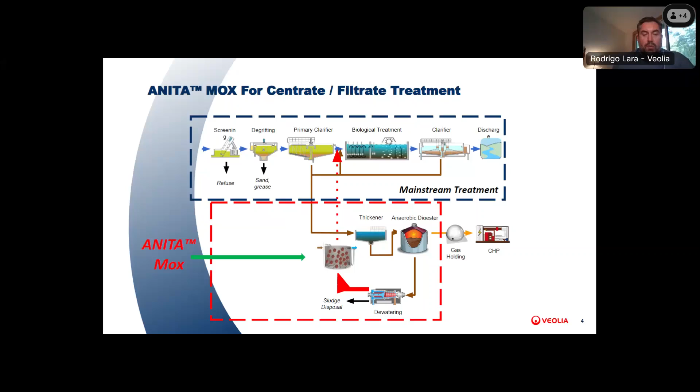Our second mode, IFAS, has the benefit of having both suspended growth and biofilm due to the use of return activated sludge by use with a clarifier. The IFAS option would be mainly for THP or food waste co-digestion systems.

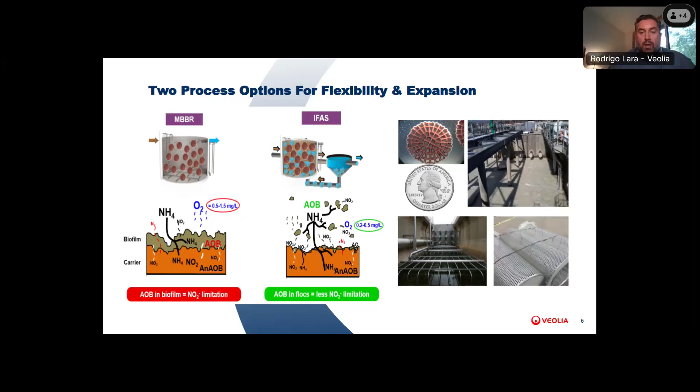The anammox media and in-basin equipment, as shown in the right slides or photos, is equipment Veolia has been using for decades in the mainstream process for traditional MBBR or IFAS processes. We've now incorporated that same media and internal tank equipment to now treat anammox bacteria. The equipment that we've used for mainstream MBBR or IFAS has been in operation around the world for over 20 years and has been highly successful. So we have taken a proven technology and incorporated it into a new process opportunity.

Biofilm technology is proven to be simple, stable, and robust. Some of the benefits that you would expect to see and will be covered by Phil and Dustin are its operator-friendly technology, resilient, it works with flexible dewatering schedules, minimal operation and maintenance requirements. Biofilm technology significantly lowers risk of anammox washout. It's very tolerant to high TSS, polymer, DO, pH, etc. It also has greater protection from shocks and toxicity.

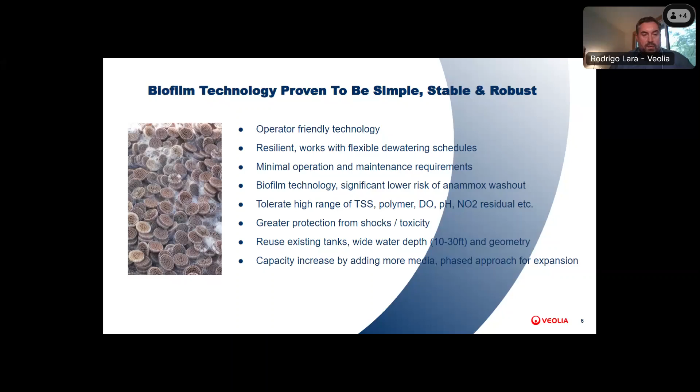As mentioned before, it is able to reuse existing tanks with a wide water depth and geometry configuration capacity. And it also has capacity increased by adding more media over time as the plant requires more process treatment. Rounding out the anammox overview, our existing plants are all operating as designed and are fully open to visitors. We have also had a number of facilities recently add in more media fill for increased performance.

ANITA Mox has been pre-selected on a number of upcoming projects, so please keep a lookout for announcements on Veolia's social media. We are continuing to pilot ANITA Mox across the U.S. and have recently added in more pilot units, so we are able to continue to offer piloting at facilities around the U.S. simultaneously. And with that, I'll turn it over to Phil Heck with Central Valley.

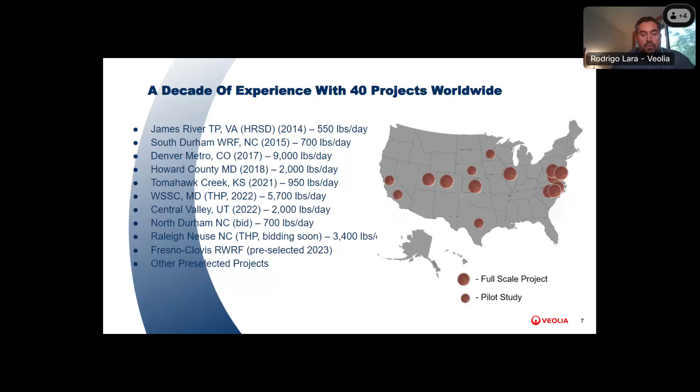Well, thank you all for joining this webcast. I'd like to talk a little bit about Central Valley Water Reclamation Facility and our experience with anammox. First, just to orient everyone, Central Valley is a regional wastewater treatment facility, and we're located at this gold star just south of Salt Lake City, Utah, and we serve the central part of the Salt Lake Valley. On the east side is the Wasatch Mountains. That's where the ski areas are that most people are familiar with.

And then the west side of the valley is the Oquirrh Mountains. So a fairly large area, about 615,000 people. And we're currently undergoing some plant upgrades and expansion that'll take our capacity to 84 MGD. Okay, next slide.

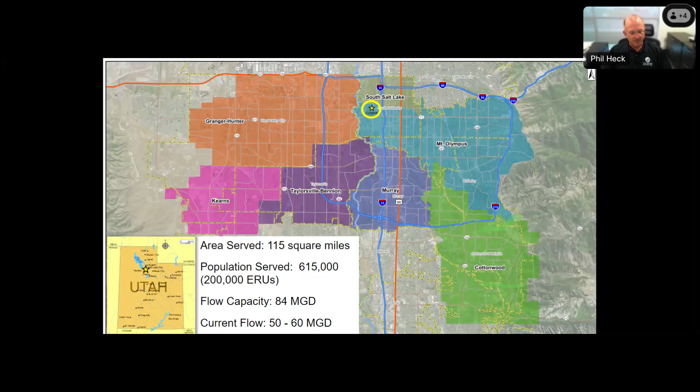Back about 10 years ago, the state of Utah Water Quality Board implemented a new rule that was called the Technically Based Phosphorus Effluent Limits Rule. That required all treatment plants in Utah to reduce their phosphorus in the effluent to less than 1 milligram per liter. We were a trickling filter solids contact plant at that point. We currently operate under that mode, and we could not remove phosphorus or nitrogen.

So we immediately started investigations on how we were going to meet this new rule. We hired an engineering firm, started a process selection process, and once we figured out what we were going to do, we did pilot testing back in 16 and 17. When we confirmed our designs and selection would work, we started design. And then in 2020, we actually started construction of our main biological nutrient removal process. And this is a process that will remove both phosphorus and total nitrogen.

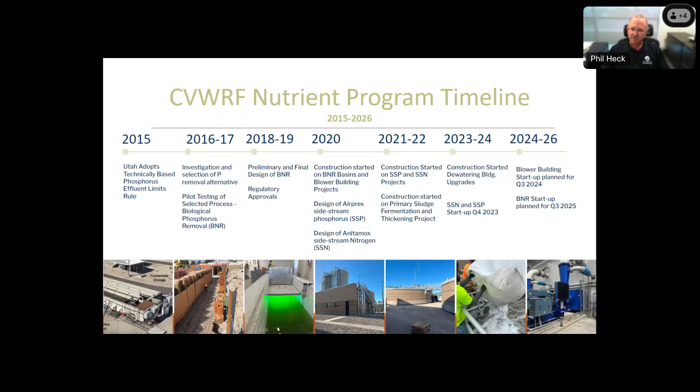As part of this selection process, we investigated side stream processes for both phosphorus and nitrogen removal from our belt press filtrate. We started the design of these two systems in 2020, and just last year in 2023, we finished construction of both the side stream nitrogen and the side stream phosphorus processes and put those into operation. We are still working on construction of our main biological nutrient process, and that will go into service next year. Next slide, please.

So an overview of our plant layout. We have sort of in the middle there, BNR anaerobic basins, and then BNR anoxic and aeration basins. Those are new processes. We have a BNR blower building, and that's all part of our mainstream biological treatment process. And we have a side stream phosphorus removal process that precipitates struvite from our digested biosolids. We have a primary sludge fermentation and thickening process to generate VFAs for our anaerobic basins and for denitrification.

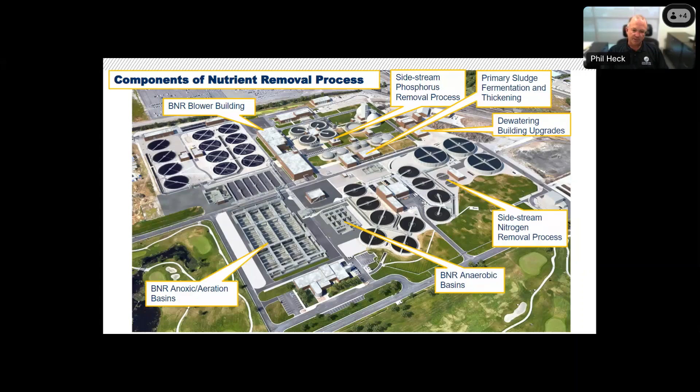We have a dewatering building. We currently have belt presses, but we're also adding some centrifuges in an ongoing process right now. And then finally, we have our side stream nitrogen removal process. And this is treating the effluent from our dewatering process and the filtrate before we return that flow back into the primary effluent. Next slide, please.

So on a process flow diagram, the upper area is all the facilities related to our new biological nutrient removal process on the mainstream and some solids. And then the two boxes down below are our side stream phosphorus. We've selected AirPrex, and then our side stream nitrogen, and that's the ANITA Mox process that we'll get into.

I'd also like to just note over on the left side, we are adding a facility that we will be starting construction in the next couple of years for high strength liquid waste. That's food waste from some industrial sources. And so we will be bringing that in and co-digesting it. And this is going to greatly increase our nitrogen load in the future. Okay, next slide, please.

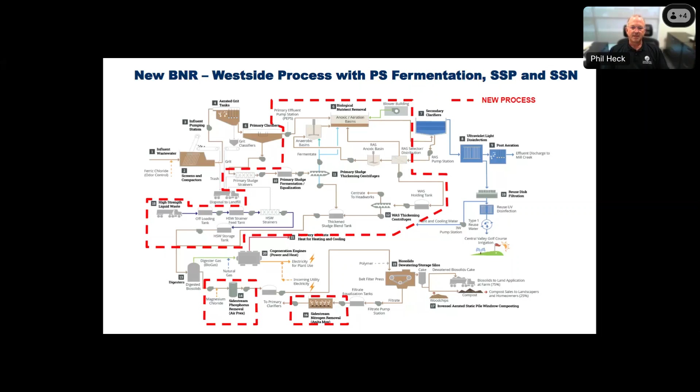So in a typical BNR process, I guess the question is, why consider the side stream nitrogen removal? Well, if you look at the lower part of the diagram, the filtrate returning back to the plant contains a fairly high level of TKN, mainly in the form of ammonia. And this typically is about 15 to 20% of the total nitrogen load on the influent. And so this ammonia that's being returned must then be nitrified and denitrified to successfully operate a BNR system.

And this consumes a lot of oxygen and carbon. And so we considered this in the design of our system, and I'll take you through some of the considerations and how it affected our main BNR process. Next slide, please.

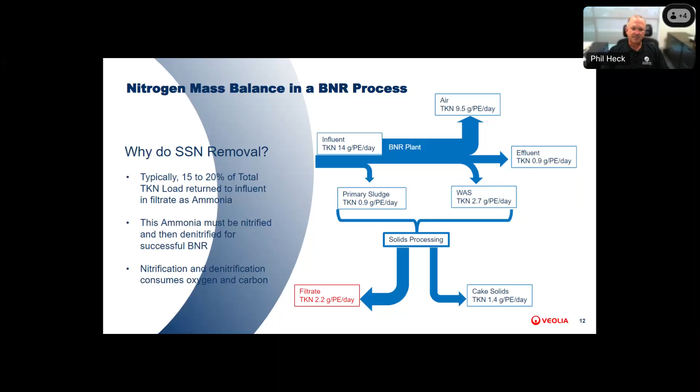So this table, I'm showing some of our modeling parameters when we were designing the overall biological treatment process here, incorporating side stream nitrogen and side stream phosphorus. So the baseline BNR column, this is the column of our design without side stream treatment processes. And then the next column over, BNR with side stream treatment. This incorporates both nitrogen and phosphorus removal. And so as you can see, there's a lot of benefits to the side stream processes.

We were able to reduce our basin volume of our aeration basins and anoxic tanks by about 16%, or 4 million gallons. Our fermentate needed for phosphorus removal and denitrification decreased by about 66%. Internal mixed liquor pumping decreased by about 54%. Our aeration demand is decreased by about 30%. WAS production about 24%, and our total power required by about 28% by incorporating both of these types of side stream processes. I'd say a lot of the benefit here is with the nitrogen removal process, especially with power and fermentate.

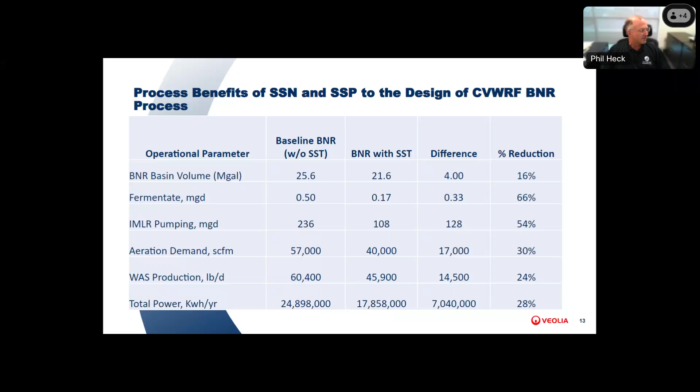We also looked at the financial benefits of both side stream nitrogen and phosphorus removal to the BNR process. And this is the main benefits for side stream nitrogen removal. So our WAS production and then the treatment and disposal of that WAS, the cost savings was about $850,000 per year, incorporating side stream nitrogen. Then on our aeration and pumping power, that's about $630,000 per year. So substantial operational cost difference.

On capital cost, there's not a lot of difference between BNR without side stream nitrogen and BNR with it. There's a small savings of about $4.7 million. But overall, if you look at a net present value over 25 years, doing the side stream nitrogen made sense. And the net PV is about $24 million. So that's a substantial savings to us. Next slide, please.

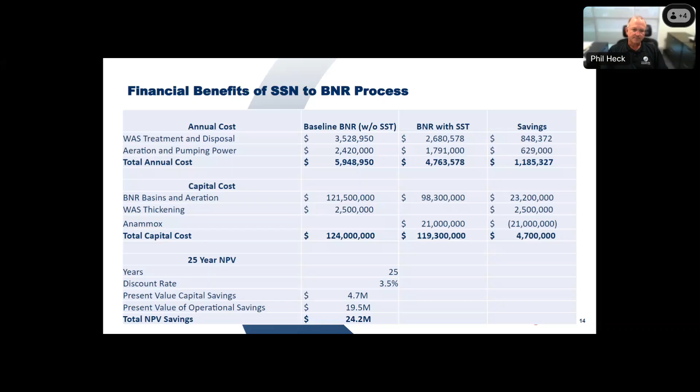So in looking for vendors for side stream nitrogen, we went about a pre-selection process and then selected a vendor and then designed around that particular vendor's offering. And we developed a committee with our own staff and with our engineers' staff and put together the selection process based on experience, design and performance of the system, the maintenance requirements, and then life cycle cost.

We asked 3 different vendors to submit proposals, and then we evaluated and scored those. The scoring included the first 3 items. The life cycle cost was hidden from all the committee until the scores on the other 3 were submitted. Then we did the life cycle costs so that we could have as unbiased a process as possible. And that's how we ended up selecting Veolia and the ANITA Mox process. Okay, next slide, please.

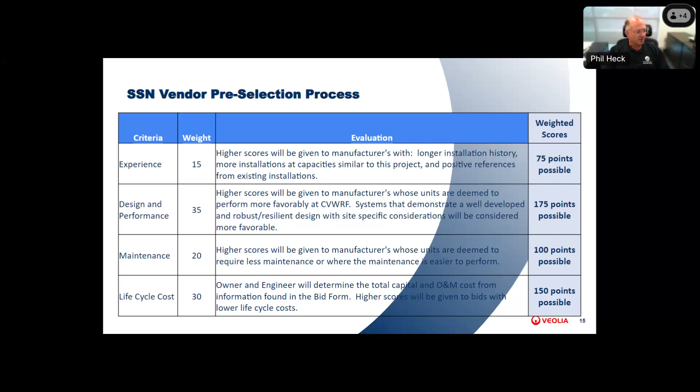So these are the 3 different processes. We looked at the DEMON process, the ANITA Mox, and the AnammoPAQ process, and some of the different configurations and ways that they operate. We liked the ANITA Mox process. It was a continuous process. We liked the biofilm component of it, and that would minimize the risk of washout.

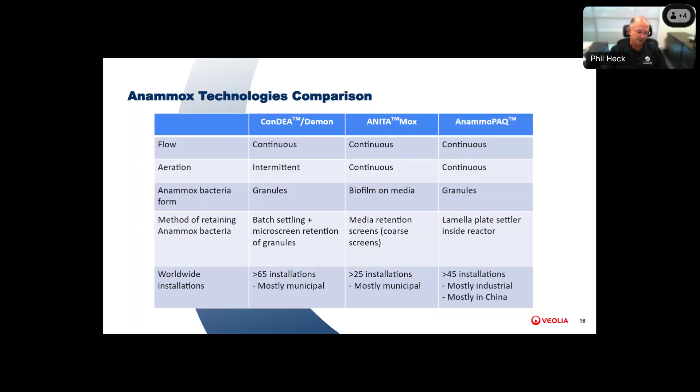And it also kind of decouples the biofilm and the bacteria associated with the treatment process from all the other solids. So you can have an upset in your dewatering process and have high solids in your filtrate, and those can wash through and they really don't have an effect on the system. So those were some of the considerations that we scored high in our evaluation. Some of the others were that we liked the fact that the process could be expanded readily by just adding fill volume of media to the reactor tanks. So next slide, please.

So in terms of our process design, we're designed for about 500,000 gallons per day of filtrate flow. We have several different sequences here that the vendors had to meet. We're going to have a startup period, which we're in right now. We're treating about 1,200 pounds of ammonia per day. Once we get our second reactor online, that'll jump up to about 2,100 pounds. And then once we get our food waste co-digestion online, that is expected to go to about 7,000 pounds per day of ammonia.

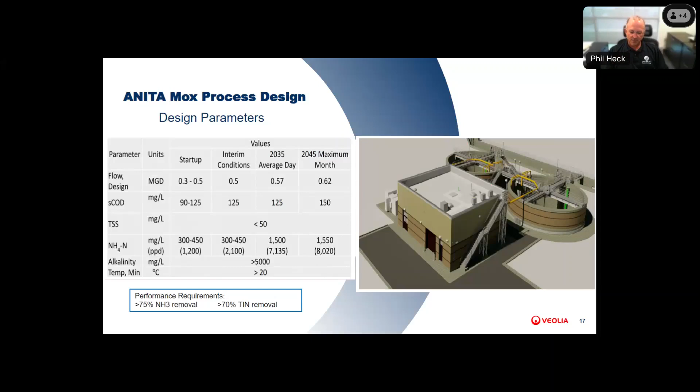Our performance requirements for the vendors were to achieve greater than 75% ammonia removal and 70% TIN removal. And Dustin will talk about the results today. Next slide, please. Oh, go back one slide. Our system consists of 2 reactor tanks and a building that houses electrical gear and blowers and foam removal or anti-foam systems and so forth. Okay, next slide.

So this process flow diagram is a little bit light, but our system is set up; we had a couple of old anaerobic digesters, and we used those as filtrate storage tanks. And in that storage process, we're putting the filtrate in those continuously. Depending on our dewatering rates, the flows vary. We try to feed the anammox process a consistent flow, so the levels in those tanks could vary throughout the day and equalize.

We also use those tanks as clarifiers, so they capture any solids that are carried over from our dewatering process, and we're removing that to try to lessen the solids load on the anammox process. And then we have the two anammox reactors and the blowers that supply air to those. We initially built 2 reactors. We have space for 1 more, and our reactors are 55 feet in diameter with a 21-foot liquid depth and about 380,000 gallons each. The fill volume of media is about 15,000 cubic feet, and so we can add more media to each of these tanks as we need to in the future.

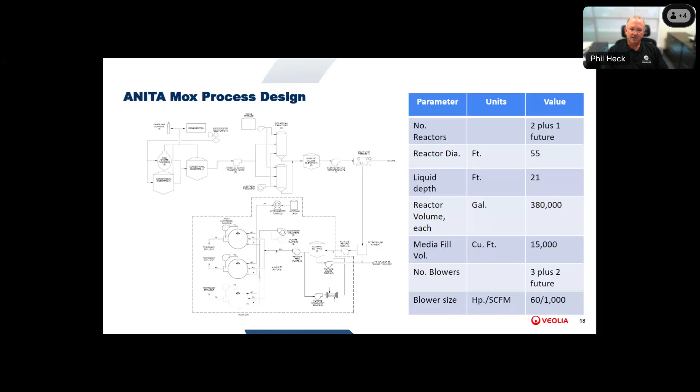So I'll turn it over to Dustin, and he'll talk about our experience with process startup. Thank you, Phil. I'm the process coordinator here, and I have overseen the startup and operation of the anammox process. It's almost a year now that we officially started up.

The first stage, I believe, began in June with the unseeded media going into reactor 1, and we had primary effluent, and that was about a 2 or 2.5 month wetting process. The plastic media has a hydrophobic nature, so Veolia does a wetting period to get rid of that, and also it grows a bit of a heterotrophic film on the media. So when we do introduce the anammox and the seeded media, we'll see it attach faster.

So we filled just 1 reactor. We're a little limited on electrical components. So even though we're designed with 2 reactors, we've only had 1 in operation this time. The second should come in operation in late September. So we're already in the wetting period for the unseeded media for reactor 2.

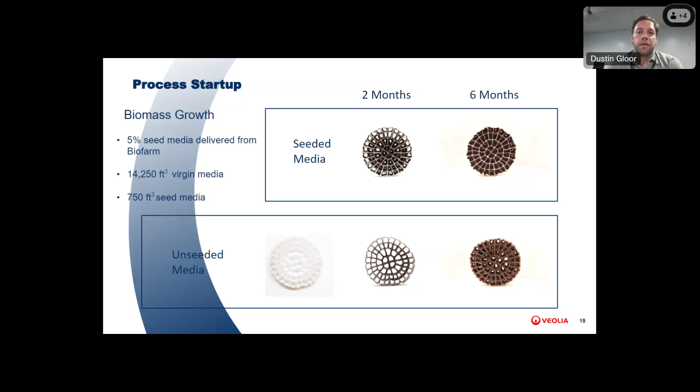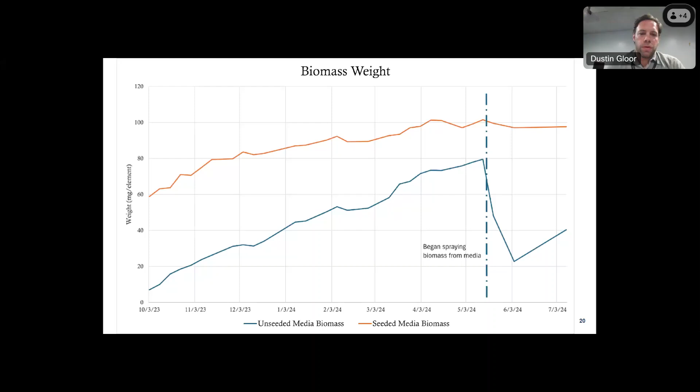Still not sure exactly what caused it, but it just highlights the resiliency of this media and the anammox process that Veolia has, that we never went too far below design removal rates, even as we lost over half of our biomass during that period. And it's bouncing back really nicely. So next slide.

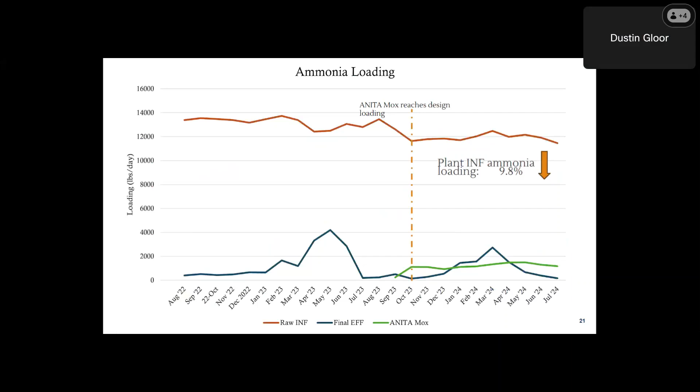And this is our ammonia loading over the past year that the anammox process has been on, and we're pulling further back just to show our influent ammonia loading has dropped almost 10%, really from the moment the anammox process reached the design loading. And again, this is just one reactor. So the design loading is about 1,100 pounds at the moment. And it's been easy to see the immediate effects of less ammonia at the head of the plant.

We've struggled with ammonia removal over the past year because we have trickling filters, followed by a solids contact basin. So we had to go from 4 trickling filters down to 3 to allow for construction to continue on the new BNR project. And when that happened, it actually removed our best ammonia removal trickling filter and left us with 3 that struggle. So the anammox process, being able to take on this amount of load so quickly just before the winter when we really struggle, was a blessing.

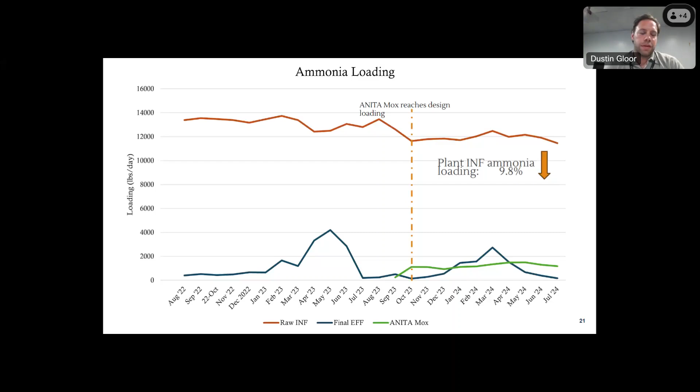So at the final effluent also, that's the blue line, we've also seen a steady decline in ammonia there. I think we've actually never seen the ammonia at our effluent so low, even in our composite samples. And we've changed some process operations at the solids contact basin to help with that, but it's definitely been this 10% drop coming into the head of the plant that's helped out. Next slide.

So the operational challenges that we faced: a couple of times we've had high TSS loads. So typically we're at 70, 80 milligrams per liter on our TSS feeding the reactor.

And we had some belt filter press issues, or times we needed to take it down for an extended period. And it's a learning process. So basically we had a lot of settling in those filtrate tanks just ahead of the anammox process. And we hadn't seen this before. So we ended up sending a lot of solids straight to the reactor.

And we had sudden drops in DO, and the ammonia removal process basically stalled momentarily until we could stop feeding the reactor and change the aeration mode, and we were back to loading it normally within 2 days. So as was discussed in the design, it played out just like that.

The high TSS load really mucked up the reactor. It was very, very visible. And within a day and a half, it cleared up pretty good with fresh filtrate. So again, it's all about the resiliency of this process. As the high TSS flushes out of the system, your anammox bacteria and your AOBs living on the media are staying in, and they're ready to treat as soon as you start sending it.

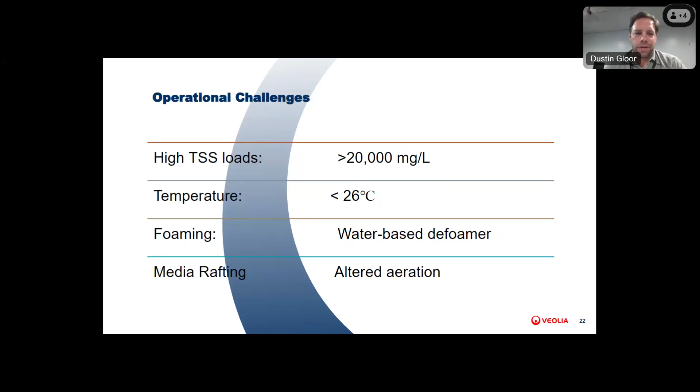So in the end, we ended up noticing that the nitrogen gas that's supposed to get released through the biofilm was getting trapped in there somehow. It may be that our biofilm was too thick, or it could have been a little excess polymer coming from dewatering, or I'm even thinking it might be one of the water-based defoamers we use, that something was keeping the gas in the biofilm, causing it to float.

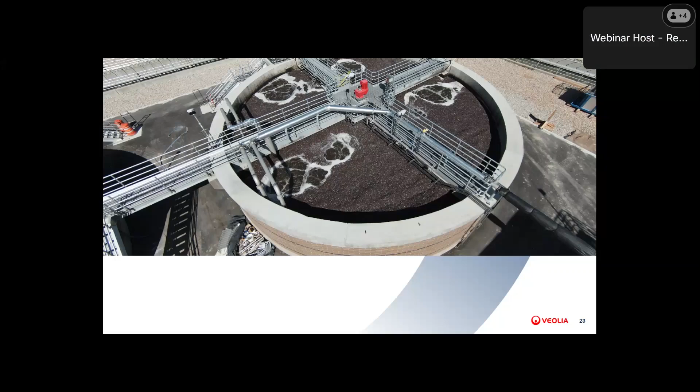We do have one. What is the ammonia load in milligrams per liter? You may have answered that already, but if not, please. Oh, no, I don't think I did. So our ammonia loading, we're designed to load above 1,000. That's what our filtrate is, but because of the BFP process, we have wash water involved and sometimes dilution water. So over the year, it's been 560 milligrams per liter. That's what we're loading at.

At times we did isolate the wash water from the filtrate, and we were about 900 to 1,000. And in those cases, you're actually more efficient on ammonia removal. So in the future, when our centrifuges and new BFPs are online, the new BFPs will separate filtrate from wash water. We should see the higher concentration of about 1,000 milligrams per liter.

All right, perfect. We have another one here. How far above design load are you for the reactors? So the interim design load is at about 1,100 pounds per day, and in the wintertime, to assist with the main process loading, we were taking on about 1,500 pounds per day. We were in conversations with Veolia the whole time to make sure we weren't doing anything crazy. They insisted that we monitor closely all the parameters, and we certainly did. So we got up to about 1,500, maybe 1,600 for a little bit.